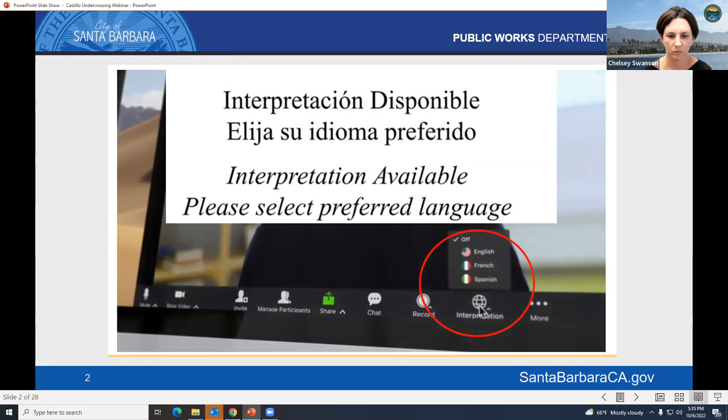Why are we here tonight? We've heard from the community through the development of the city's pedestrian master plan and bicycle master plan update that biking and walking does not feel safe or comfortable at the Castillo Street undercrossing, where Castillo goes under Highway 101, and also leading up to the undercrossing on Castillo and Haley Streets. Castillo Street is also a Vision Zero priority corridor, an area where serious injuries or fatal collisions occur in a consistent pattern. This corridor is identified in our planning documents as an area that needs safety improvements for walking and biking facilities. The city received grant funding to develop preliminary design concepts for these safety improvements, and that's why we're here tonight, to receive feedback from the community.

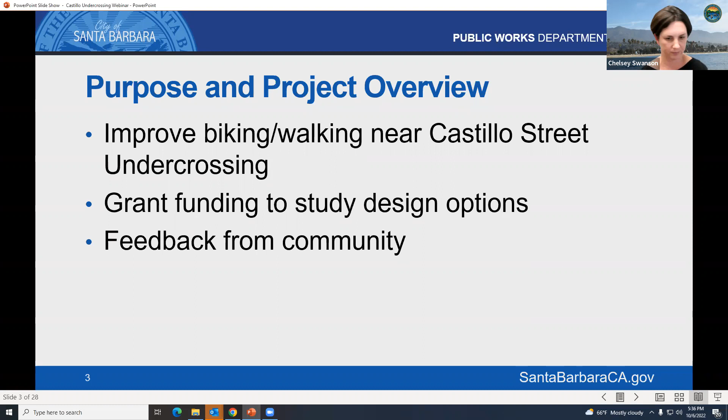Demonstrating the need for enhanced bike facilities at the Castillo Street undercrossing, these photos are taken on Castillo Street, south of the freeway, where the bike lane ends and cyclists are forced to ride in the lane with traffic while going uphill. This is one of the locations where enhanced facilities are proposed.

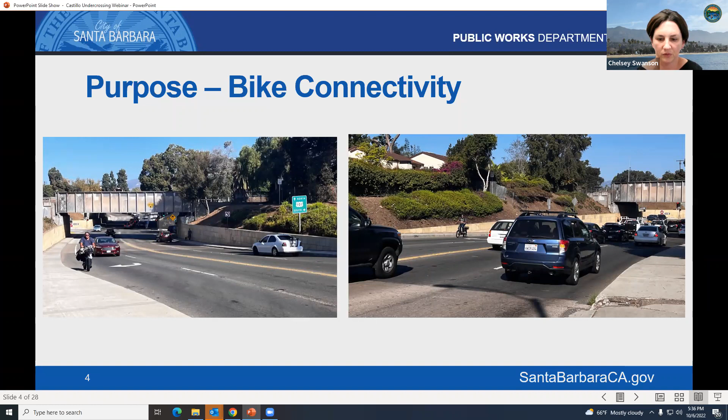This graphic shows existing bike facilities where the solid arrows are, and future planned bike facilities where the dashed arrows are. You can see where there are gaps in the connectivity on Haley Street and also on Castillo Street.

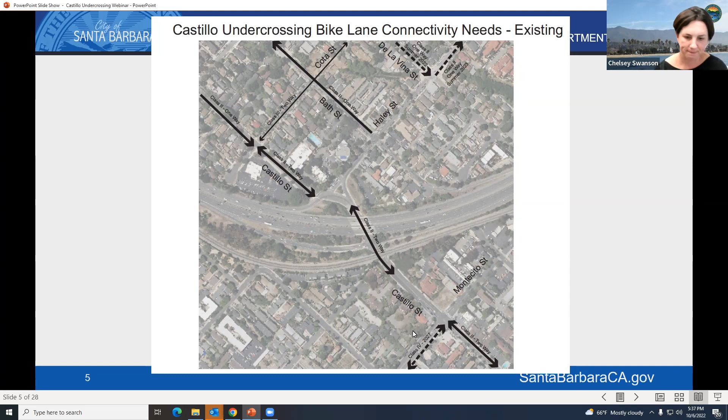This graphic more clearly shows the gaps in the bike network shown in red. Potential solutions include: on eastbound Haley, a class 2 bike lane going towards downtown. On Castillo Street, north of the undercrossing, a class 2 lane in the uphill direction and a short class 3 lane in the downhill direction. Then on Castillo Street, between the undercrossing and Montecito Street, an in-street class 2 bike lane that would turn into a raised protected bike lane close to Montecito Street, and a class 3 shared lane in the downhill direction. We'll go into more details in just a few minutes on these improvements.

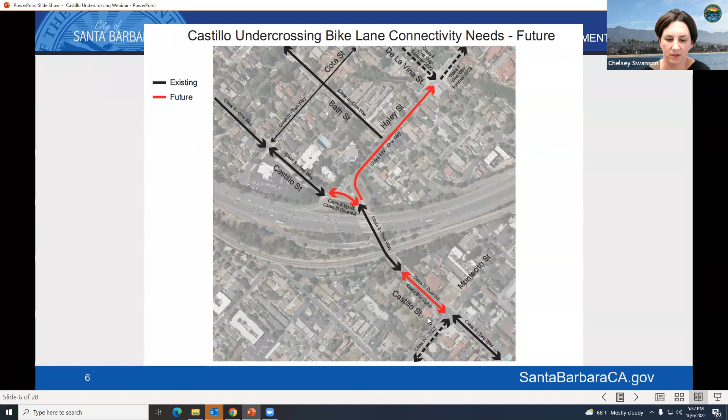This slide shows on the left, Haley Street, where there's a 5 foot wide narrow sidewalk with no parkway, right adjacent to the traffic. On the right is again an ideal sidewalk corridor with a 6 foot wide sidewalk and about 4 foot wide tree wells.

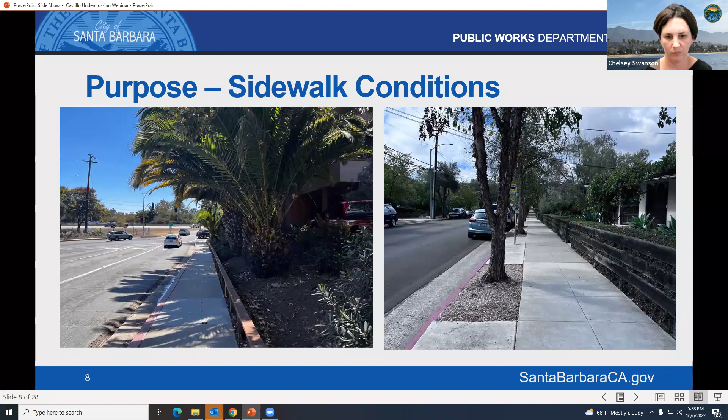This graphic is taken from the city's pedestrian master plan, and again demonstrates an ideal sidewalk corridor width for roads that have a 60 foot right of way or greater. The frontage zone shown here is typically on private property, so the portions in the right of way would be the 6-foot sidewalk and the 4-foot wide parkway.

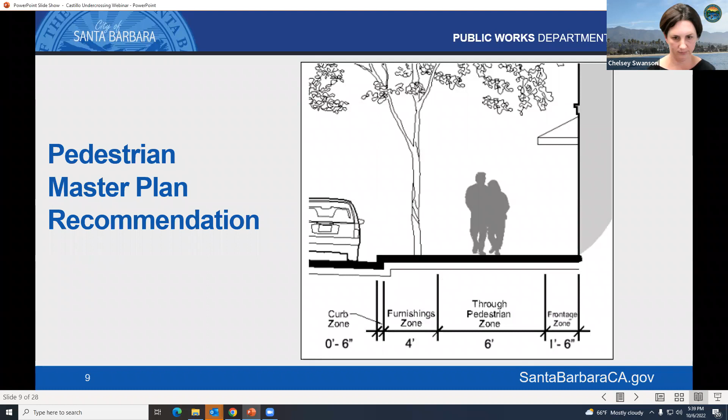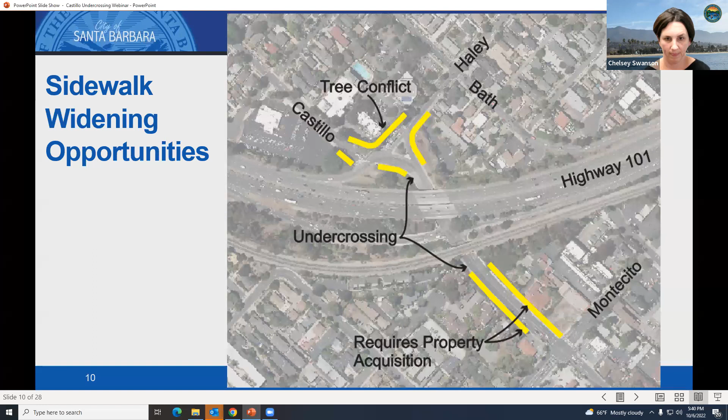We're looking at opportunities to connect some of the missing gaps in the bike network and improve the sidewalk network in the vicinity of the undercrossing. Unfortunately, the undercrossing of both the train bridge and underneath the freeway is not the most pleasant place to walk or bike, to put it mildly. But that is a much bigger project to take on. It's a really complex project.

There's a high water table. The overhead clearances under the train bridge and the freeway are currently substandard, so if anything were to be replaced, it would either need to go deeper or up over top. The northbound on-ramp onto the freeway is substandard. There's just a whole lot of things that are substandard.

The point I'm getting to is in order to widen the sidewalks, widen the bike lanes, and make the interchange more comfortable for all road users, it would require a complete interchange replacement. We don't even know what that would cost—probably somewhere in the $50 to $100 million range, possibly even more. Unfortunately, there is not that kind of funding available right now.

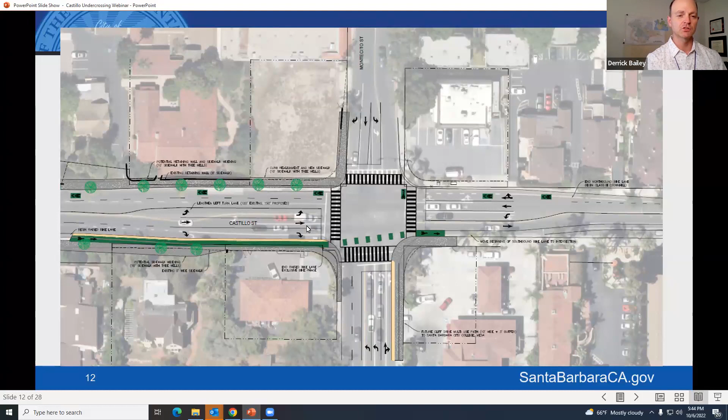In the northbound direction, there just isn't enough room to provide a bike lane in both directions. We think the uphill direction is more important because of that heavy right turn lane, and because cyclists have a harder time going uphill—there's more speed differential between cyclists and traffic. In the downhill direction, it's a lot easier for cyclists to keep up with traffic.

In the downhill direction going north towards the freeway, cyclists would share the lane with traffic.

As far as some of the sidewalk widening opportunities, you can see the gray shaded areas—that's some of the opportunities. There's one location, right where Chelsey's hovering the cursor, where some property acquisition would be required in order to fully widen that sidewalk to 10 feet and provide street trees and lighting. We could fit lighting in without property acquisition, but to get street trees and a nice wide sidewalk, that would require some property acquisition right there.

One other thing to point out on this diagram, at the bottom of the screen, is the future Cliff Drive multi-use path. From Castillo Street along the south side of Montecito Street, all the way up the hill past City College and out to the roundabout, is a planned bike path that would tie into this intersection. This is going to be a very important connection in our bike network someday, and that's one of the reasons why we're looking at this.

If you want to go to the next slide, we'll move up Castillo Street towards the freeway.

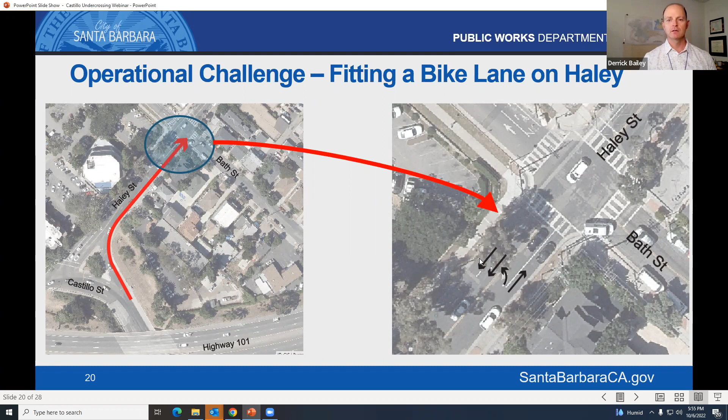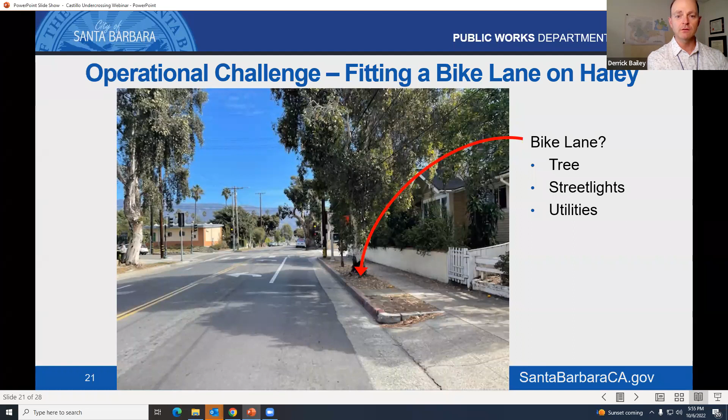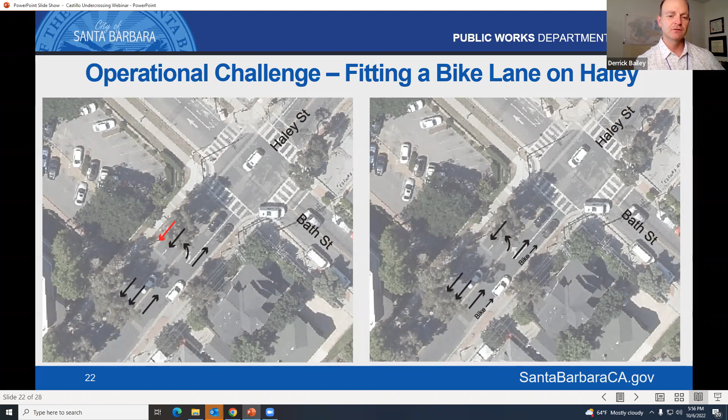But in order to reduce the lanes going westbound from the intersection, that has implications too that we'll look at in the next slide.

That zooms in on the intersection itself. On the west of the intersection going towards the freeway, there would just be one lane immediately west of the intersection. We call that an accepting lane, the side of the intersection that accepts the traffic. On the other side of the intersection on Haley Street, there's currently two lanes feeding into it, so one of those lanes would have to go away because there would only be one accepting lane on the other side.

That would slightly reduce the capacity of the intersection. That second lane is not very long, so it doesn't add a significant amount of capacity, but it's also a good place to pass in case somebody's turning left to go down Bath Street.

In order to offset that loss of capacity, we looked at turning Bath Street into potentially a one-way street for a portion of it. So instead of being a two-way street immediately south of Haley, what if it was a one-way street? One lane would be a dedicated left turn lane to go towards the on-ramp and City College, which is a really heavy movement, and then there would be one lane to go straight up Bath Street.

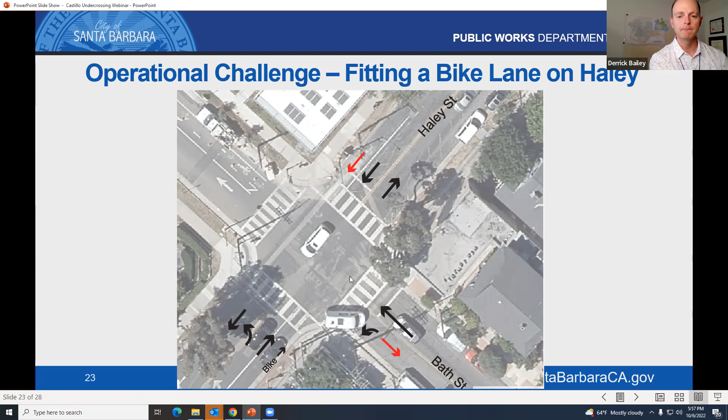We had a specific meeting on this last Thursday, a webinar. If you weren't able to attend, it's available on our website, and we dig into more detail on this and some of the traffic performance. Traffic performance is actually improved because there are two lanes on Bath Street, and there's a need for capacity there. But there are some access trade-offs as we're looking at right here, and we look at some traffic volumes and delay associated with that. If you have time, check that out on our website.

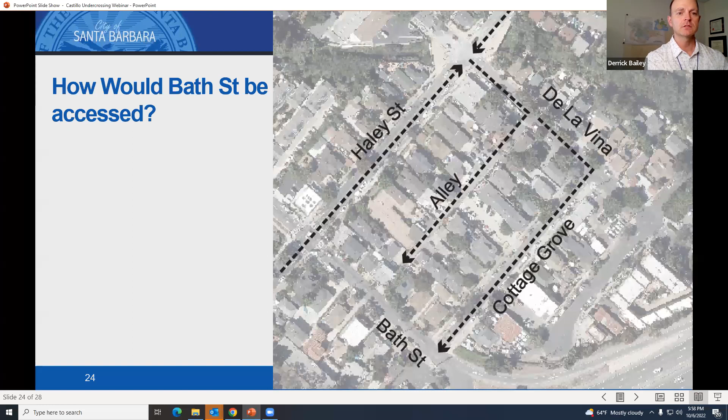The next steps for this project and planning process: we're going to meet in person this Saturday, the 8th. We'll be at the Haley and De La Vina Bridge on the sidewalk, with some tables set up, you won't be able to miss us, and we'll be there from 10 to noon. We're going to go over the same information we went over tonight, and there won't be a formal presentation, so you can stop by anytime and check out the plans in more detail and ask questions.

And then on October 27th, we'll take the project before the Transportation Circulation Committee. That's a public meeting in the evening, also in person, open to the public, at 630 Garden Street. We're going to gather feedback from these public meetings, analyze it, and refine the project accordingly. And if there are still details or input we need from the public, we may have additional public meetings in the next few months.

The goal of this outreach effort is to have a community-supported project ready for going out for grant funding in 2023 or 2024 for final design and construction. If grant funding is received in 2024, we would return to the community, probably closer to the grant application. And if we're successful, we would again go out to the community with an update on the project and get more feedback. Then if we were moving on to construction, it would be around 2027, 2028.

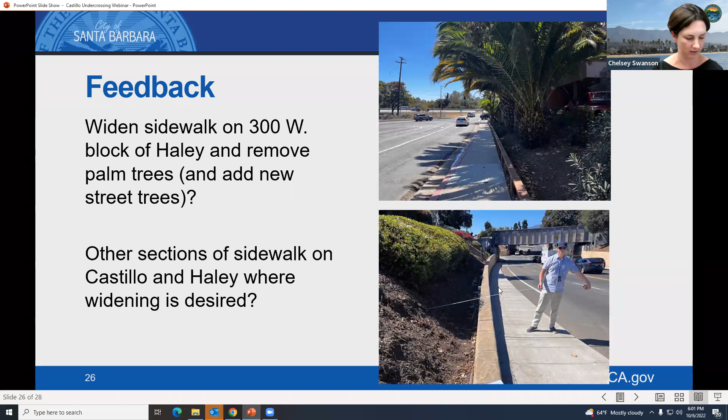So just to wrap it up, we look forward to your feedback. A few items to let us know your thoughts on: the sidewalk widening option on the 300 West block of Haley Street, which would require removal of those palm trees with new street trees added in - whether you think that's a good idea in this location. If there's any other sections of sidewalk on Castillo or Haley you'd like us to focus on, the bottom photo of Derrick holding the tape measure shows the potential for how the sidewalk could be widened within that area to 10 feet. We'd also like to hear your feedback on the two options for bike lanes on the 200 block of West Haley that Derrick went over - the on-street bike lane versus the raised bike lane on the inside of the parking.

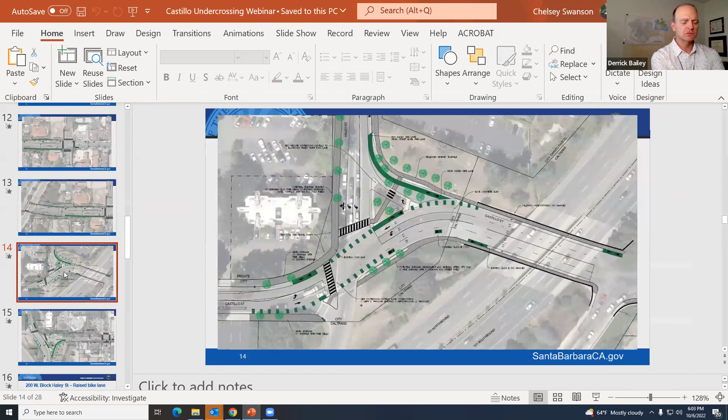Thanks, Jessica, I'll take that one. We actually looked at that 5 or 6 years ago or so, not in very much detail though. There's actually not as much room there as one would think, and the angles at which the streets come in, it wouldn't function particularly well. We don't think we could get it to work there, even though it seems like there's a lot of room. You'd be surprised how large roundabouts are. For example, Haley Street is kind of between 40 and 46 feet wide in this area. A single lane roundabout, like at Cliff Drive and Las Positas, is usually close to 110 feet across. So if you just look at the width of Haley Street right there and go over double it, that would be the width of just the circulatory roadway - not even including the parkways or sidewalks on the outside of that. So unfortunately, we don't think it would fit here. The footprint of the Castillo-Montecito intersection is even smaller, so it wouldn't fit there either. But we do like roundabouts, and in the right conditions it's a really elegant solution.

Thanks, Derrick. The next question is: can we implement speed limit to 25 miles per hour under the bridge at Castillo? And if we can add - I'm sorry, let me see if I'm reading this correctly - a Castillo crossing light for traffic under the bridge. Not sure if I interpreted that question correctly. First is the speed, and if they could clarify, type in an additional clarification for the Castillo crossing light. Can we go back to that question, Jessica? I need to look up what the existing speed limit is under there. Sure, sure, yes, we'll go back to that one.

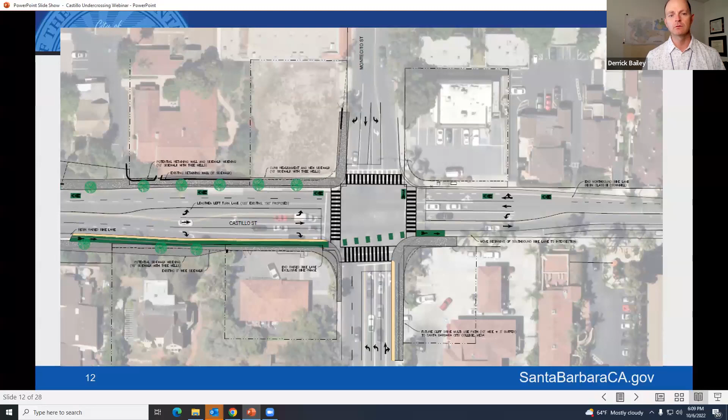And then if we want to go back to that first image two slides earlier. We'll start on the very right-hand side of the screen. That's the bike lane coming up from the beach. That bike lane will end just before it gets to the 7-Eleven, and cyclists will have to take the lane, that curb lane. One thing to point out here, there's that vacant property on the northeast corner. Whether it's with this project as a city project, or if that develops by then, that curb alignment is going to be straightened out. As you know, that current curb alignment is kind of a holdover from when there used to be a gas station there. So we're proposing to straighten that out, and the sidewalk will be widened to a full 10 feet in front of that property. So that will provide a straightened curb alignment, giving a straight alignment for that lane going across the intersection towards downtown. And again, the bikes would stay in the curb lane until they get closer to the freeway. Then once they get closer to the freeway under the train bridge, the road starts to get a little wider, and there is enough room for a bike lane just immediately under the train bridge.

Again, I know this is a lot to absorb. We'll have these diagrams on our website if you want to look at them and spend a little more time poring over them.

Derrick, were you ready to discuss the speed limit? Yes. So the speed limit on Castillo Street from Cabrillo all the way up to Cottage Hospital is 25 miles an hour. That's the speed limit, and fully acknowledging that the operating speeds under the underpass, people do gain a little bit of speed there. So that becomes more of an enforcement issue. We've established what the safe operating speed is at 25 miles per hour, but as far as the operating speeds go, that's another issue.

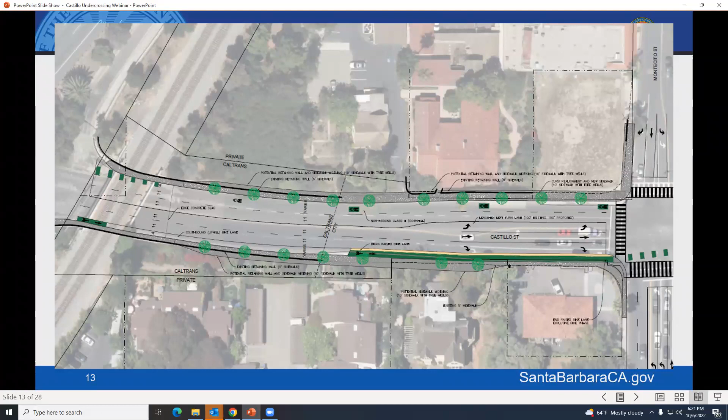Immensely. You have no idea what I've seen. It's scary. The last comment I'd like to make is just in general, when you're considering a bike path that's going next to parked cars, I see this also on Bath and on Upper State. Parked cars, the doors, when they open, if there's a person in that car, those doors are opening into the bike lane. And I've seen bicycles collide with car doors because there's not an allowance between the bike lane and where the parked car is.

So I just invite you to consider allowing a little bit more space, because people aren't trained to do the Dutch reach where they're turning around and looking for an oncoming bicyclist. They just open the door, and what I find as a bicyclist is just assuming a car door will open, because it happens so often that I'm wandering out of the bike lane into the driving lane with all the cars, because these parked cars keep opening the car doors into the lane, and it's equally dangerous. So I hope you'll consider, I know it's another problem to solve, but as you're designing and improving the bike lanes here in Santa Barbara, that you'll keep that parked car scenario and doors opening into the bike lane in mind.

Thank you for hearing us. Angela, I thank you, I appreciate the feedback.

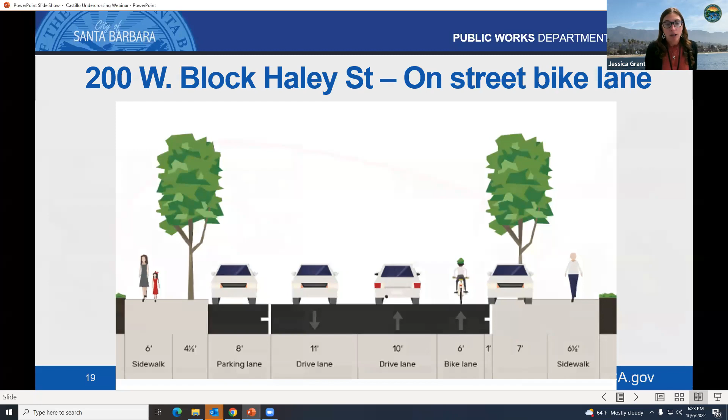Since we're on the image right now, that was the two options for Haley Street, where one would be a bike lane next to parked vehicles. But Chelsey, if you could go to that other image, the other scenario would be siting the bike lane adjacent to the sidewalk, where the cyclists are not next to the parked cars.

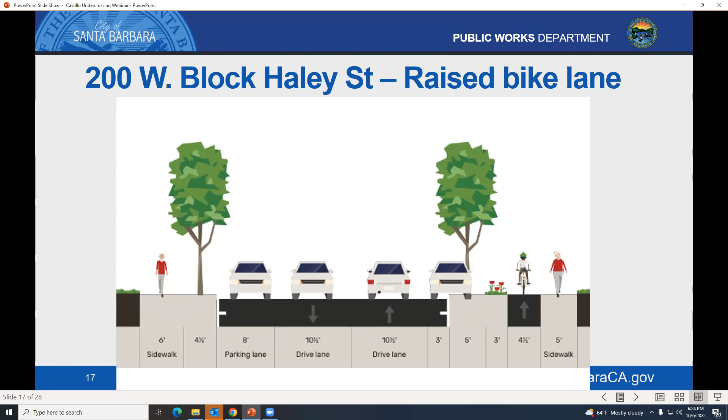What were your thoughts on that, Angela? So I understand that this is all a big balancing act. Obviously the ideal would be the image you're showing now, where the bicyclist is not in danger of having to navigate all these vehicles that aren't going to respect a bicyclist's space. But given the costs and complications of removing the light fixtures, et cetera, honestly I think a good backup plan would be to have that lane in with the traffic, provided that there is a barrier in that one little curve going into Haley, because that's also dodgy.

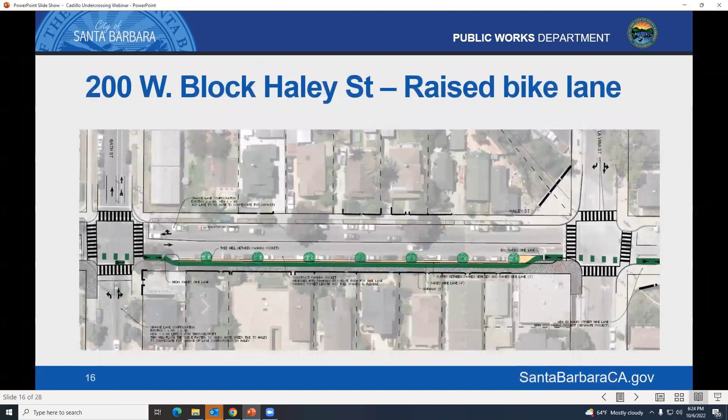So on the underpass and then that curve as it approaches into Haley, having a lane for the bicycles and a lane for the cars, I think is a reasonable plan. But I would only say it's reasonable as long as there is a barrier, just because of the traffic patterns and because people are either unaware or they don't care about the fact that there are so many bicyclists around.

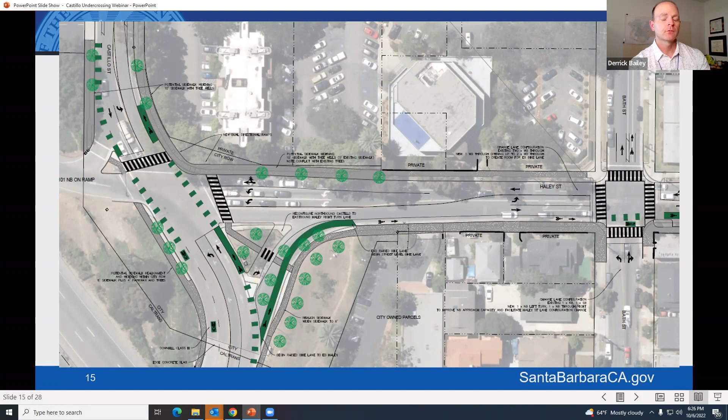Thanks, Jessica. We haven't had an issue with the sidewalk on Carrillo Street, which I kind of like in this one too, just as far as proximity to the freeway. Where we tend to see more problems with blocking the sidewalk is under structures, under bridges. The sidewalk under the bridge is very narrow, and the bridge abutments on either side aren't getting any wider, so that sidewalk isn't getting any wider. So I wouldn't expect it would be an issue.

One thing we've had a few conversations about with the Genealogical Society, we met with them a few weeks ago. They pointed out that behind those orange retaining walls, more towards the property line fences, there's a level area that's easy to access and easy to hang out in. One thing Caltrans has actually done on a few other underpasses around town is put a slope all the way back from the retaining wall to the fence line, so it's not a comfortable or level place to set up. That's something we're already looking at. But it's a good point about the wider sidewalk, and let us chew on that one for a bit.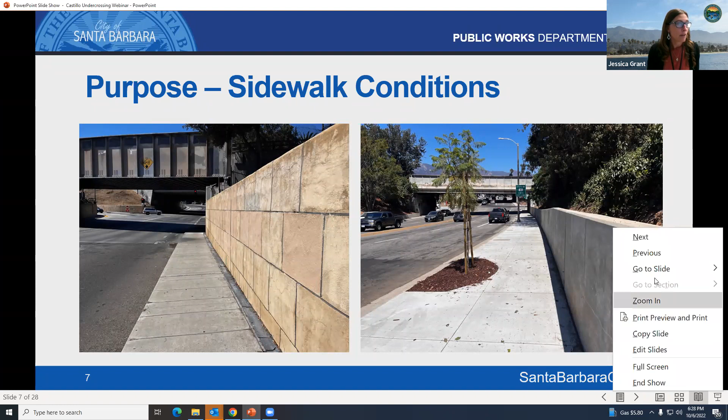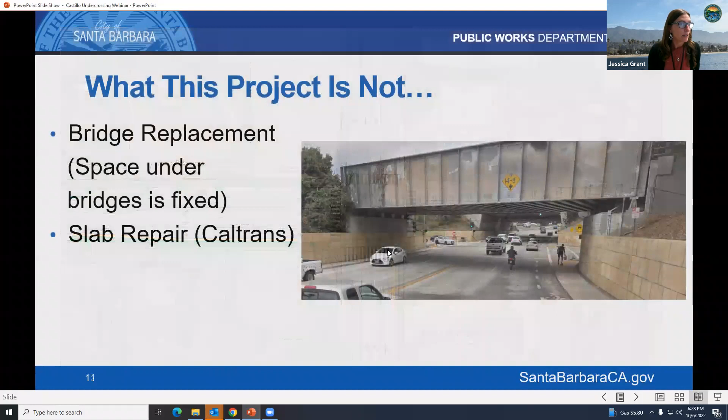The next one: shifting the curved part of Castillo near the freeway on-ramp to the north by taking up more of the sidewalk on the north side would also increase the arc length of the curb. Coupled with the bright yellow curb separating the bike lane from the car, I would expect cars to slow down even more.

Do you want me to read that one? No, I think I understand. So Chelsea, the office building on the northeast corner of Haley and Castillo, you can hover over that. Yeah, so shifting Castillo Street a little bit towards that office building would kind of smooth out the curve south of the intersection. It might provide a little bit of extra room for some kind of separation.

Yeah, that is possible. We can look at that and see what kind of space we could possibly gain out of it. The trade-off, if I understand your comment correctly, is that we would lose some of the opportunity to widen the sidewalk in front of that office building. But yeah, we could potentially gain some space that might make the cycling experience safer and more pleasant. So we'll look at that. Thank you.

Okay, that was it for the questions at this time. Again, we encourage you to come on Saturday, and please tell your friends and neighbors about this. It's really good to see we have the whole entire route plotted out, so it's a little bit easier. It's harder sometimes on these webinars because they break it up into sections, so this is just one way to experience what the entire route or proposed changes would include.

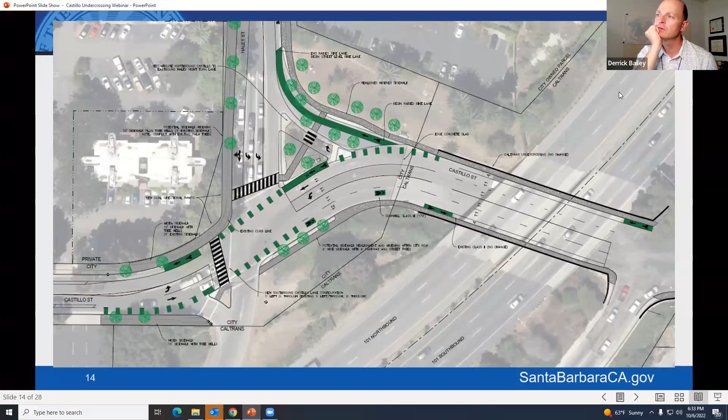Okay, that makes sense. Might actually be safest for cyclists to take the lane. But your comment about shifting the triangle towards the downtown direction makes sense as far as creating more space. We'll play with that and see how much space we can get. That whole concept of the tightness of the curve and a vehicle next to a bike facility, whatever it might look like, was something we were struggling with.

Okay, am I still on? Yes. Okay, in that case I'll ask another question. Was it the option of just making it effectively one lane each way, with queuing lanes for the left and right turn traffic going onto 101 southbound? Because when I'm going through there, it seems like it's de facto one lane each way, since there's almost always a queue of some kind.

Yeah, it's kind of a lane balancing exercise as well, where you need lanes feeding into intersections and accepting lanes on the far side of intersections. One of the major movements that feeds into the underpass going towards the beach is on Haley Street. If you're going on Haley towards the freeway, there are 2 left turn lanes, because that's a very heavy left turn movement. So there has to be 2 accepting lanes on the departure side of the intersection, and there just wouldn't be enough room to merge those 2 left turn lanes together under the bridge.